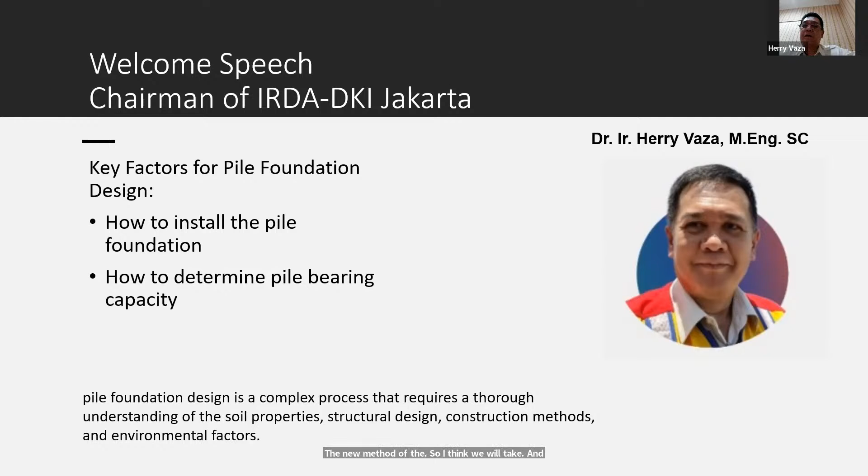So I think today, Mr. Chu and Wayan, Pak Wayan, and then Mr. Marcel would like to introduce to us the new method of the foundation. So I think we will be patient and try to take in all the introduction from him, and probably that can be of advantage to us to use in Indonesia, especially in upcoming projects that we will finish in the next 2 years. Thank you very much, enjoy the seminar and have the benefit from the webinar.

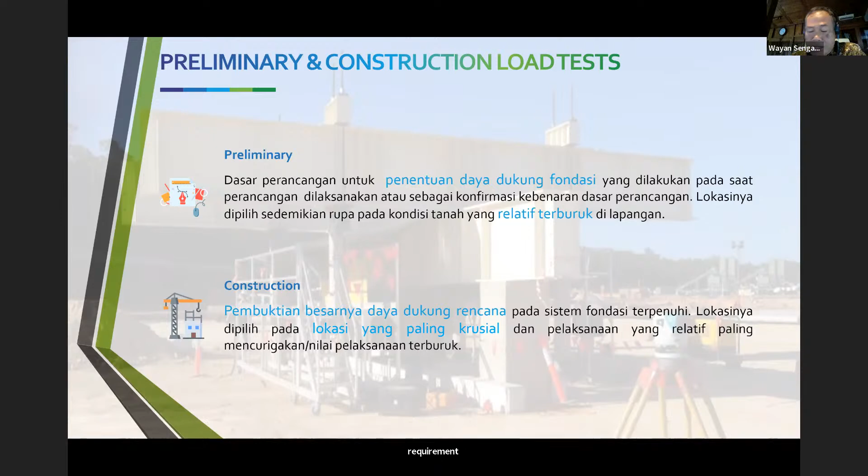So for the load test, we refer to SNI 8460 2017. This is actually the geotechnical requirement, where within this geotechnical requirement we have the specific pile foundation requirement. So this is the list, I think I saw it. So you can find this in the SNI geotechnic standard.

What is the minimum factor of safety for the design? What is the tolerable settlement? What type of loading combination and support, the lateral capacity, what is the requirement? And the last one is the pile test, what is the number of pile tests.

Whether it's axial, static, lateral, and tension, and also whether static or dynamic. For the load test, we have the axial requirement: axial compression, axial tension, and lateral.

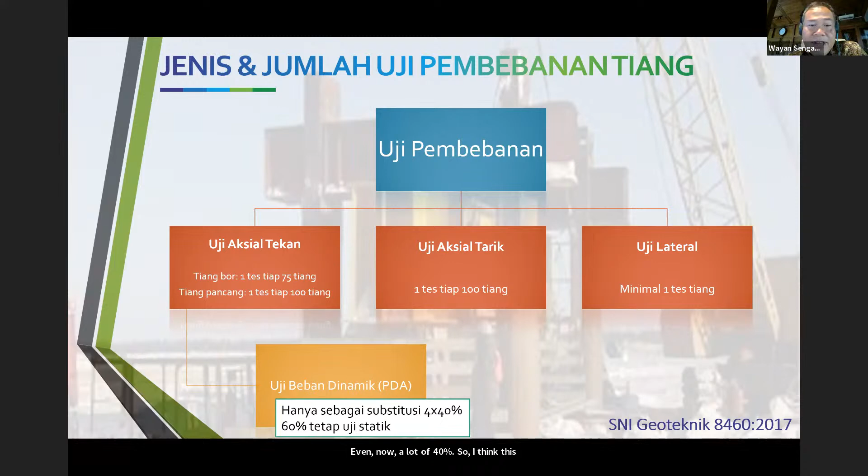This has been proposed last time by the Authority Committee of Jakarta, but I think also the SNI of geotechnical also refers to that. Even now a lot use 40%, so I think this is too many.

A lot of 40% of the total static load test could be replaced by PDA. So I think today's webinar would like to evaluate this requirement, and if we would like to be more stringent, like what is conducted in Singapore, for example, Europe, United States, and also Japan, there is a limited number of PDA, but with more number of static or equivalent static, like maybe what we will discuss today, Statnamic or StatRapid load test.

Okay, this is just another requirement. We need to do 200% of the design load. We can do more than 200%, but usually the requirement is 200%, and also with the maximum displacement allowed for the acceptance of the pile load test.

If we refer to AASHTO, for example, for the particular bridge design, we have this requirement for driven pile and also for bore pile, and the number of load tests is actually not stated clearly, but for every different zone we need to have at least one static load test, and for dynamic test minimum 2% of production piles need to be tested.

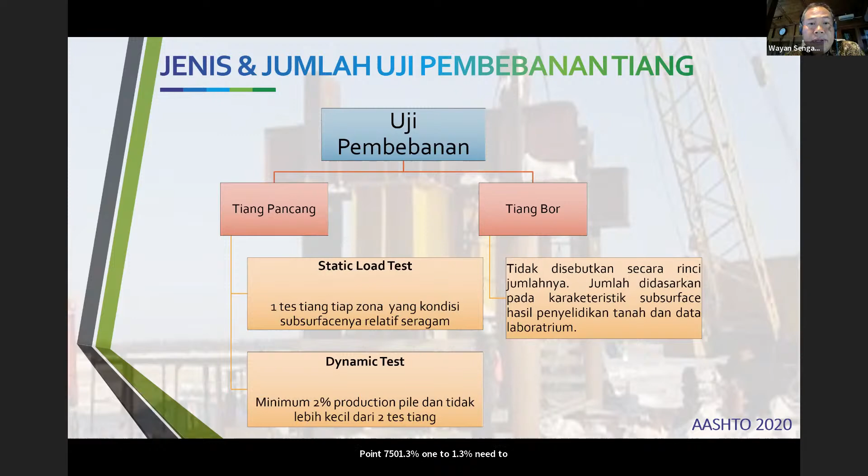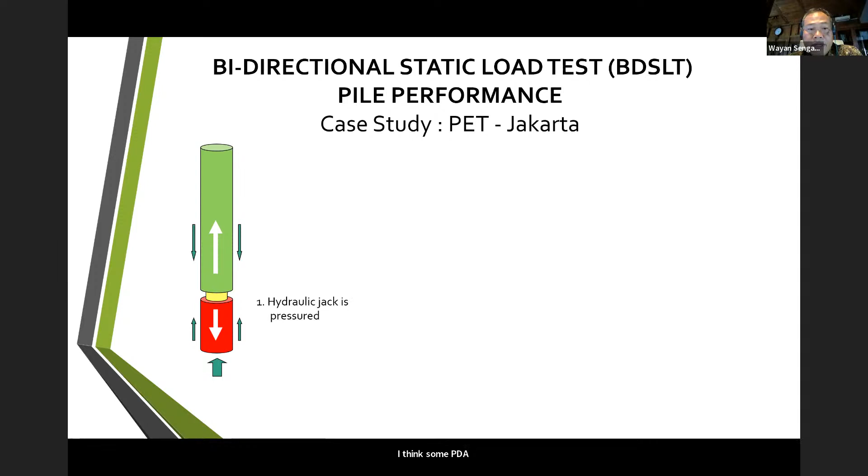Well, again I agree with Herry. The problem with this is we need to locate the cell. There is a theoretical interpretation of this test, so that the unit skin friction at the upper part needs to be equal to the unit skin friction at the bottom, with additional bearing capacity of the pile, which we actually cannot determine yet, but we need to somehow decide that.

We have experience conducting this load test in Jakarta for a super high-rise building, well, a proposed super high-rise building, but not yet constructed right now—up to 9,000 tons, this is a very long pile, up to 110 meters below the ground.

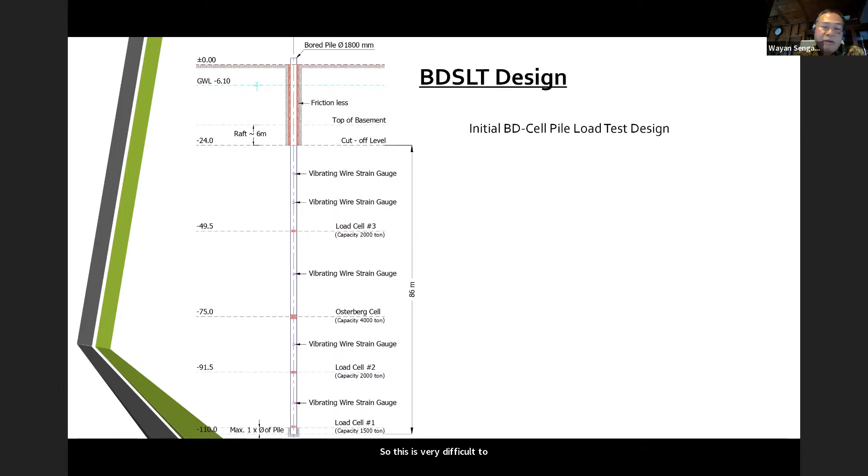So this is very difficult to determine the location of the load cell—this is just our recommendation. But actually the contractor proposed this, and the location was at that particular location, and we are not sure whether the mobilized friction at the top and also the mobilized friction at the bottom plus the end bearing is in equilibrium or not.

So the limitation of this kind of test would be, well, we need to theoretically determine the level of the cells. Some of the end bearing or skin friction might not be fully mobilized. And also it's relatively complicated—the instrumentation takes some time, we need to wait for the hardening of the concrete.

And also, the last time what we identified is the load inclination issue for high pressure load, particularly for high pressure load, and also there's some issue on the interpretation of the load system. Well, this is a new method in Indonesia, even though in other countries this kind of test has been conducted for many years in the US, Europe, and also Singapore.

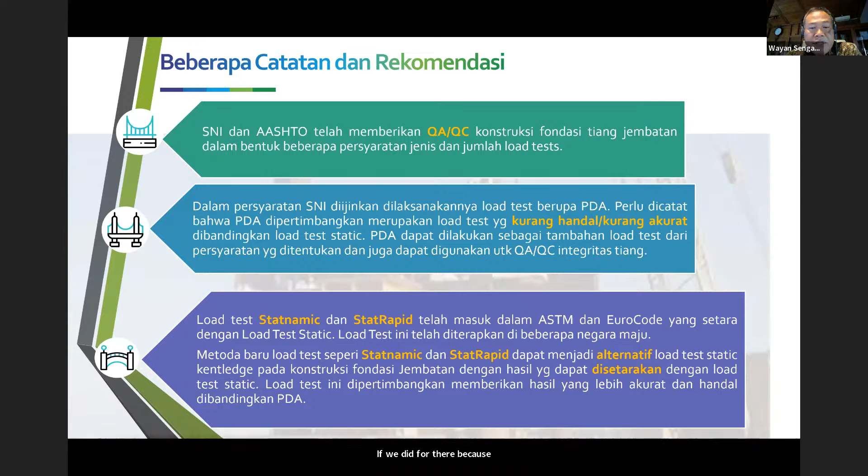So this is a good opportunity to apply it in Indonesia. Later on, maybe the SNI needs to be evaluated further, because Statnamic and StatRapid are more reliable compared to PDA. So those are some of the items we need to identify.

I hope these items can be useful for discussion later on after the Professor Chu presentation. Thank you, Pak Adib. Thank you, Pak Herry. So that's the end of my presentation.

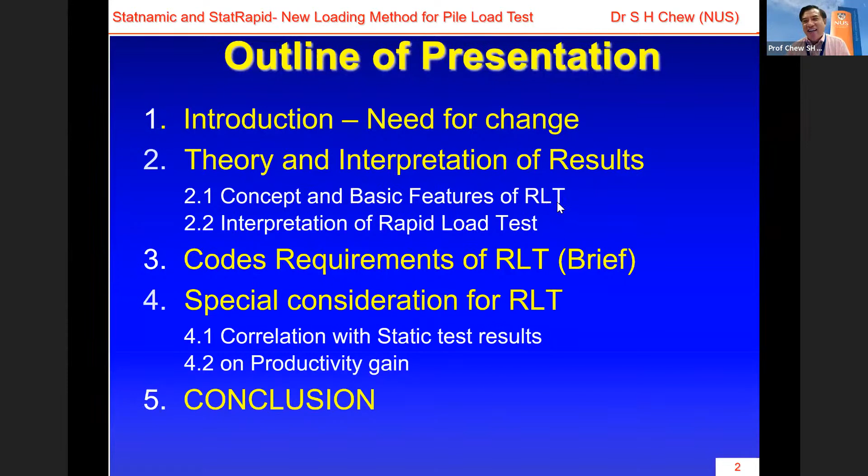Okay, so that's the scope. Everybody still there? Yes? Marcel, yes, you still there?

Okay, good. Now, being a professor in university, we always like to go back to the very basic and fundamental. So what is a pile test for? Pile tests are needed for one or more of these four reasons.

Number one, to determine the bearing capacity of the pile, which I'm sure you all agree on. We want to know what is the ultimate bearing capacity. Number two, which is very important - I saw in your Indonesian code, you also have it.

To determine the settlement of the pile when it's subject to N times the working load, N can be 1.5 or 2 times the working load. We want to know, when the pile is subject to this load, what is the settlement?

Now I will share Singapore, Malaysia experience on this, because we build a lot of high-rise buildings, and I'm sure your capital too. When you have a high-rise building, settlement control becomes very, very important, because you cannot have a high-rise building that's tilting, or one with differential settlement, which is very dangerous. So in Singapore, Malaysia, we have very strict control on this, and that's where rapid load test becomes very useful.

Number three, related to number one, is determining the soil parameters used in your pile design. In Indonesia, I think you call this the preliminary pile load test. I'm sure you do this to verify your shaft friction and unit end bearing, so from here you check your calculation. Rapid load test can do this too, and you use the same strain gauge design as in a normal static load test. So there's no difference - the only difference is the way you apply the load.

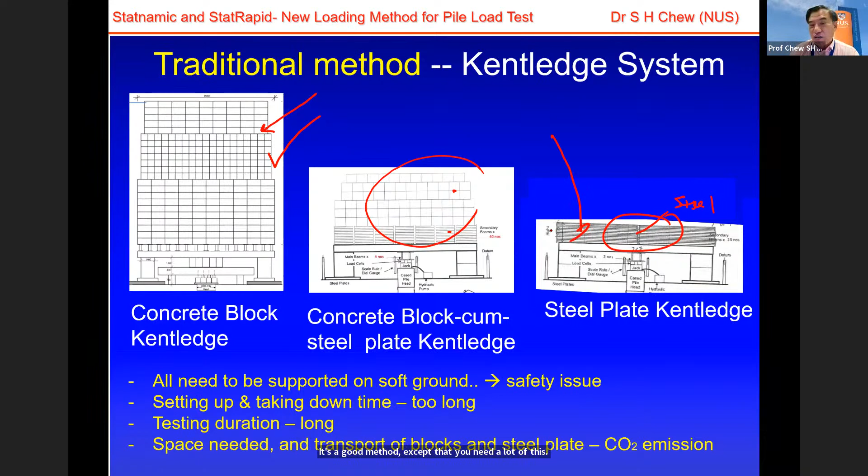Traditionally we use the kentledge block - you can see it on the left-hand side, this is a kentledge block. Then there's also the steel plate method, which saves height - the kentledge block and steel plate have less height, but the total weight is the same. This is a combination of the two. This is a traditional method, and it's a good method, except that you need a lot of this material.

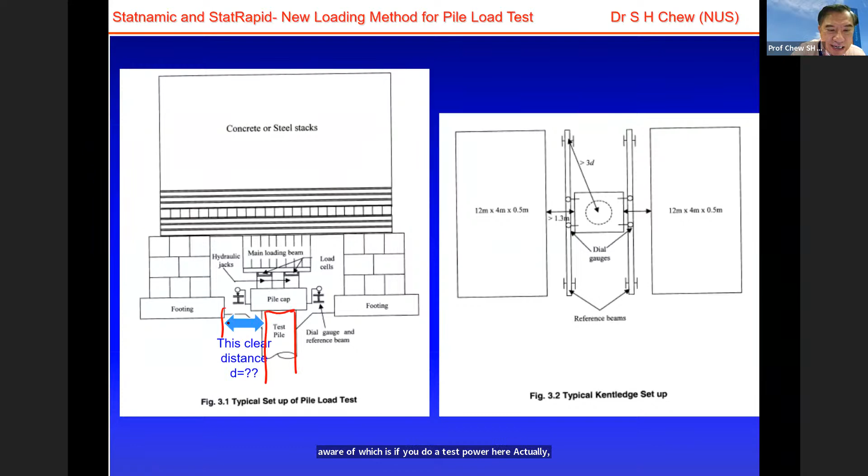This needs time and also extra money. Now, there's also one aspect that not many people are aware of: if you do a test pile here, you actually need to have a clear distance between the test pile and the footing of your kentledge block or steel block. You need this clear distance.

Not many people are aware that this clear distance in the old ASTM was only 1.5 meters or so. But today, it's actually 2.5 to 3 times the diameter of the pile. So if your diameter is 1.5 meters, 3 times the diameter is 4.5 meters. You should have 4.5 meters here, and then another 4.5 plus 1.5. So this distance from here to here is going to be 10 to 18 meters, maybe 17 or 18 meters, which is very wide.

So to support this wide area, first you need a wide space - you occupy a lot of space in your construction site. Number two, to support that, your girder and beam design will have to be very careful. This is something people may overlook - you need a wide span. If you put it too close, the stress bulb is going to unfairly make your pile look too strong.

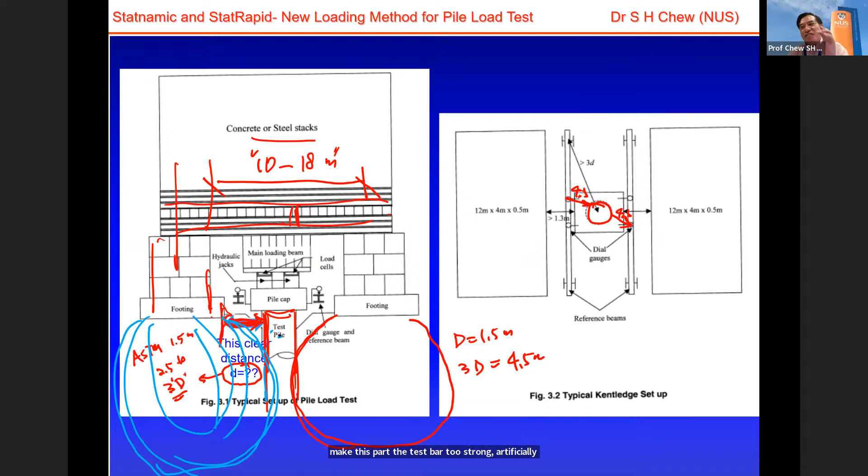You understand my point? If your distance is not big enough, the stress bulb applied here will make this test pile artificially too strong, which is not right. So this is something some people have misunderstood.

Minimum spacing is 3D, whichever is greater. I summarized different codes of different countries. As I said, ASTM long ago was 1.5 - that's because at that time all the piles were very small. But today, if you look at ASTM and later codes, it's actually 3D, 5D, 4D. A lot of these go to 3 times the diameter of the pile. So you really need a big span.

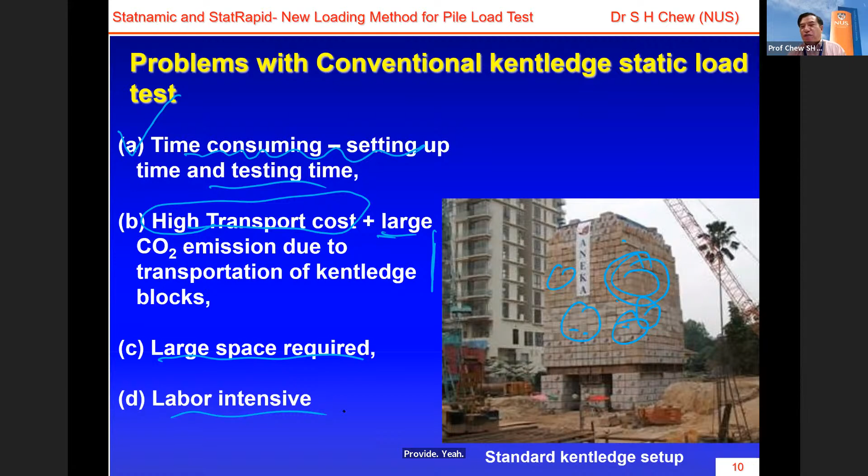Now, more important is safety. So let me show you this - maybe let me show you a video. This happened in Singapore, and you can see the kentledge block actually...

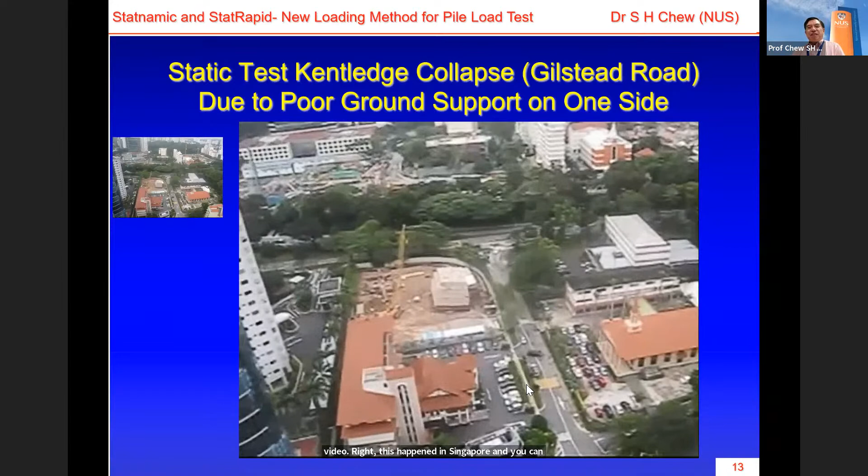Okay. Can you guys see the video? Did you guys see the video? Can someone respond to me? Yes, you can see the video. Although it's moving frame by frame, you can see it, right? You see the whole issue, huh? Okay, I don't need to repeat.

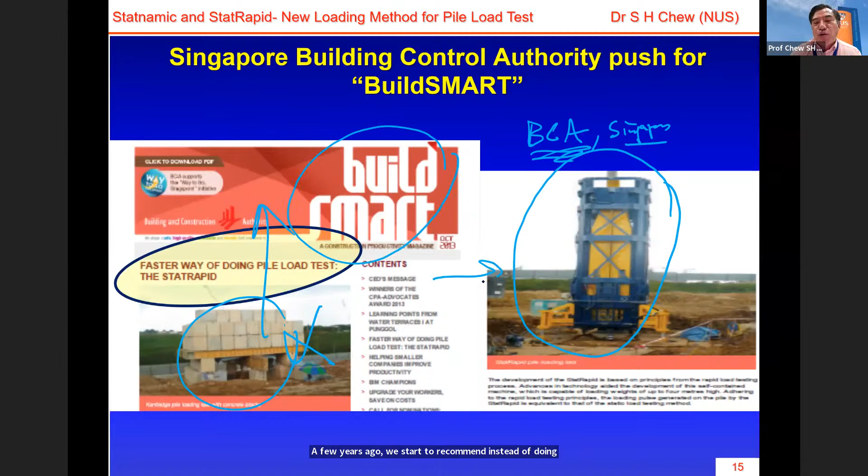So that's the reason why in Singapore, the Singapore Building and Construction Authority, a few years ago, started to recommend that instead of doing this high pile testing, we change to building smarter. So we moved to what we call rapid load test. Let me summarize the advantages of rapid load test first.

Rapid load test reduces the setup time - I'll show you, it's very fast to set up, just one day. Limited space requirement - I'll talk to you about this. And less transporting, because you don't need to carry that much concrete blocks or steel plates - I'll show you. And the result correlates very well with static load test. This is very important. In short, it's accepted in ASTM, Eurocode, and Japan code.

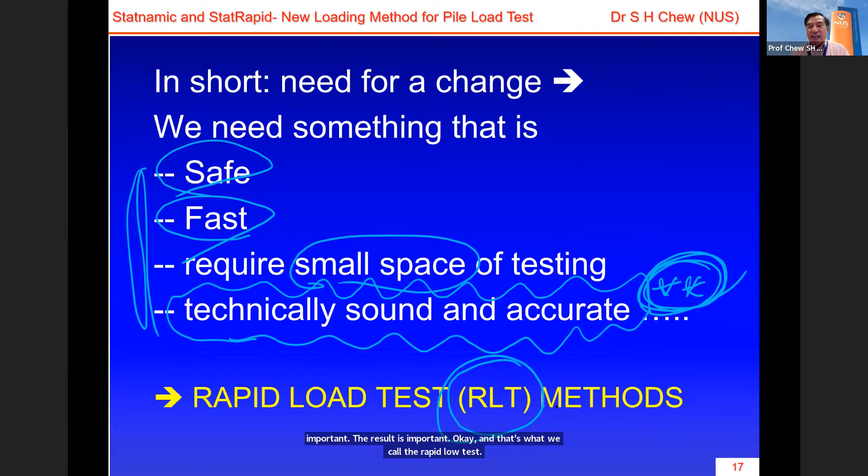High productivity - let me summarize. Safe, fast, small space, and technically sound and accurate. So to summarize: rapid load test is safe, fast, requires small space, and is technically sound and technically accurate. This is important, as a professor, the result is important. That's what we call the rapid load test. So that's a quick overview, introduction.

Before I tell you what that method is, let me make a break. 30-second break. So far, is everybody okay? Can you hear me clearly? Any immediate questions? Please ask if there is.

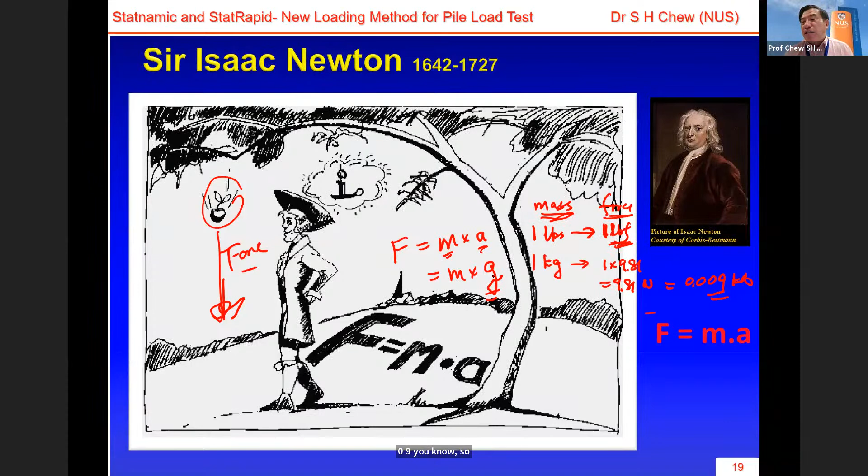But ask yourself, what if the acceleration is 20 g? What if this A equals 20 times g? So therefore, 1 pound of apple will produce 20 pound force now. Can you see that? Instead of 1, I can produce 20 pound force.

So 1 kilogram of mass will produce 20 times - 1 kilogram times 20 times 9.81. So we produce 20 times the equivalent mass of force. Very good, you see that?

Now let me stop here. Remember just now we said the static load test - you need to stack up all the concrete blocks, very heavy. Now I can reduce that by 20 times, 1 over 20. So if you need a 1,000 ton test load, I only need 50 tons instead of 1,000 tons of concrete blocks. That's very beautiful, that's the whole idea.

Okay, so that's Newton's law. But at the same time, we also need what we call this second guy. Just now, that one is a guy from a few hundred years ago, Newton. But I also need a young man, a 21st century man, to make the machine. So this is under TNO.

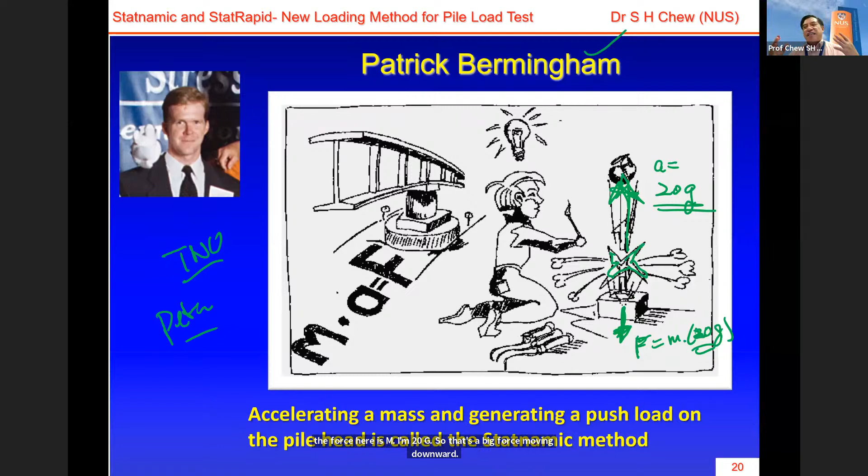So that is the Statnamic - that is the one called Statnamic. Statnamic is not an English word, it's static plus dynamic combined together to become Statnamic. Static plus dynamic - that's how they created this word, Statnamic.

So that is what Peter and the gang have done. Now, what they had to do is make a machine like this - this is the machine that they make. Inside that, there's a white-colored mass, and that mass is equal to 1 over 20 times the test load.

So if the test load is 1,000 tons, I only need this equal to 50 tons. Very little, 50 tons versus test load of 1,000 tons. Okay, I'm mixing the unit of mass and force, you know what I mean, equivalent. So if you need 1,000 tons to test, I only need 50 tons of weight.

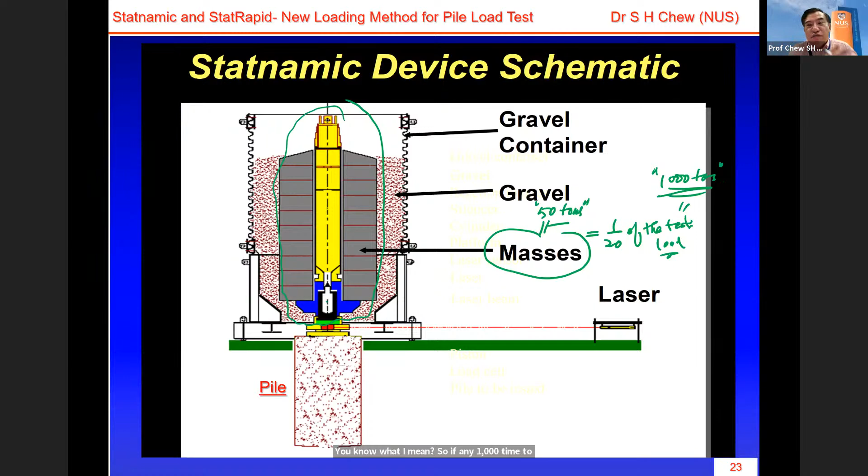Now you need a special thing, which is a special chamber, where I put a special fuel in this confined chamber. Later on, you have a gaseous expansion, expanding very rapidly, and that will produce a large uplift force. This uplift force will push the pile downward, can you see that?

This force pushes the pile down, and then you measure it. That is the whole test. That's it, so that's simple. Okay, you can skip this one.

Now I talk about this fuel. People may get worried, what is this fuel? Actually, this fuel is something like this. Now and then you will light it up. Don't worry, this is not explosive, not like C4 explosive. Actually, it's something like that.

When you burn it, I have a video, I don't know whether it will work or not, let me try. When you light it with a lighter, right, it jams a little bit. You see, you can still hold it.

Okay, can you see the video? Yes, right? Yes, hello, yeah okay. So you can see that actually there's no danger, it's just hot, hold it hot.

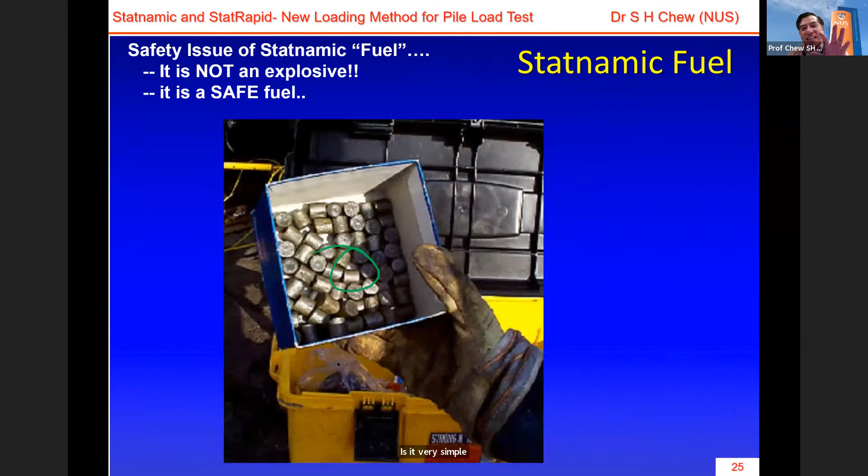But if you put it in a confined chamber, the volume expands very fast, and using physics, Boyle's law and so on, you push up the whole thing, and the force comes down. That's it. Very simple mechanism, developed by TNO at that time, and Peter was one of the key members.

I think the company that I support technically, Mr. Tan and Marcel's company, they can do this test for you. These are some of the tests you can see. Maybe I can skip this, or do you want to see this one? Maybe I'll show this one.

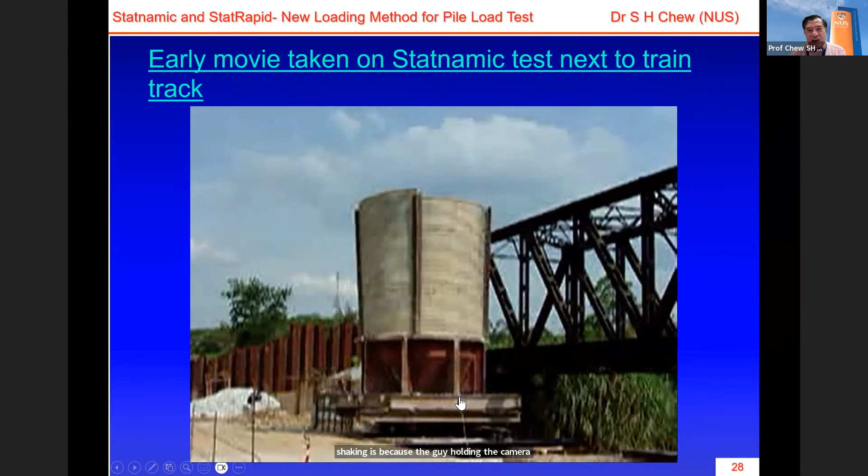This video, okay, I think it's coming up. The video shaking is because the guy holding the camera is next to the Malaysia Railroad, watch out. See that? Okay, you hear the loud voice, the thing goes boom, up, and pushes apart.

That's it. Just now Professor Dr. Henry was asking me how long the test will take. That's all the test, setup may take one day, when you test, that's over. That's it, okay, so we have done a lot.

Just showing you some examples. This is a very limited example that I show you. We have done a lot, a lot meaning in the number of hundreds, if not thousands, in the last 20 years in Malaysia and Singapore.

But the famous ones, Penang Second Bridge, and in Singapore and Malaysia we did it next to a train track. In Singapore, the port development, we did it a few times. And of course, as I said yesterday, in some of the big housing development projects.

Oh sorry, what am I doing? This, no, I can skip this one. In housing development, HDB blocks of Singapore, I think you all know, actually they do a lot of this test.

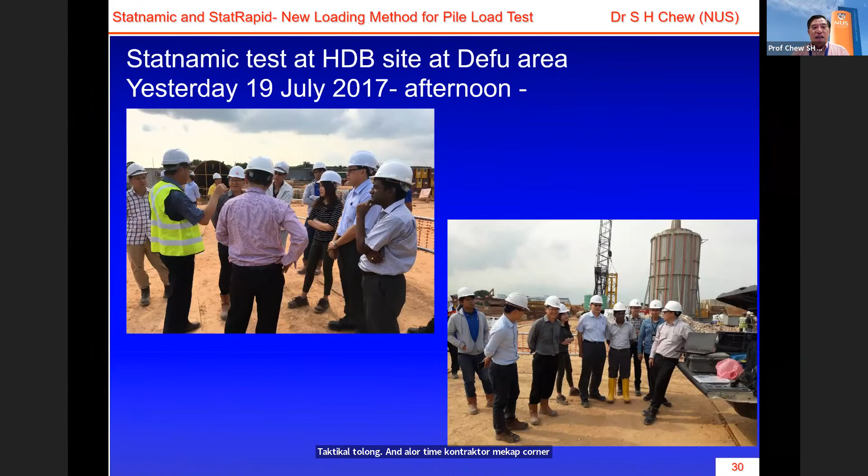Why? Because they have a lot of high-rise buildings to build in a short time, and they need to test all of them. Using static test is going to take too long, and a lot of times a contractor may cut corners. So therefore, rapid load test, after I introduced to them, they were very happy, and we use a lot of it. These are the engineers, officers I talked to, with happy faces, and these are the results.

Now I just want to show you, yeah, this is the result you get immediately. When you run the test, boom, within 100 or 200 milliseconds, like this, then you get a result on the screen. This picture is a load, this is a load, and this is time. So it goes up and comes down.

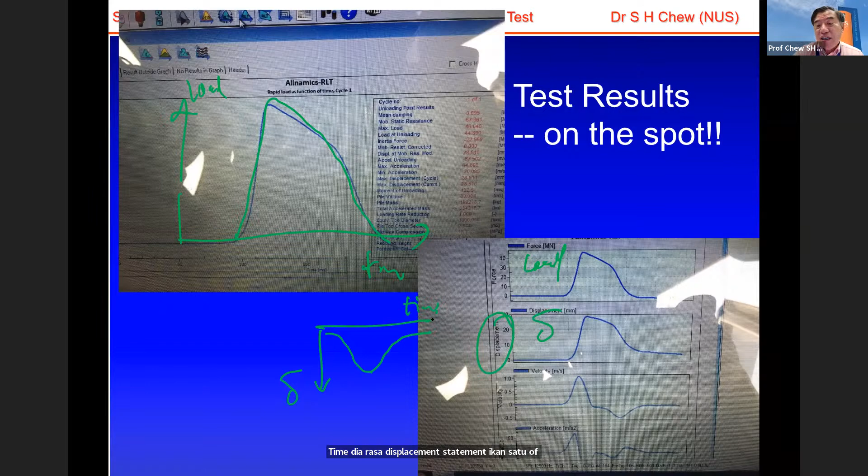This is load, and this is displacement settlement. You settle, of course, and it's the other way around, settle and come back, so this is settlement, and this is time. And then this is the velocity, this is acceleration. So you get all these results on the screen.

That's it, over. Technically, you know whether the test passes or fails. But of course, you let the company go back for 1-2 days to compile the report and send it to you. But basically, you know the result on the spot.

Some of you may be concerned about vibration. We also monitor vibration, and in fact you'll find that all the vibration is well within limits, of course within 10 meters it's big, but further than 10 meters it's nothing. It's well within all the construction limits. In fact, I published together with Peter a paper on vibration in Japan.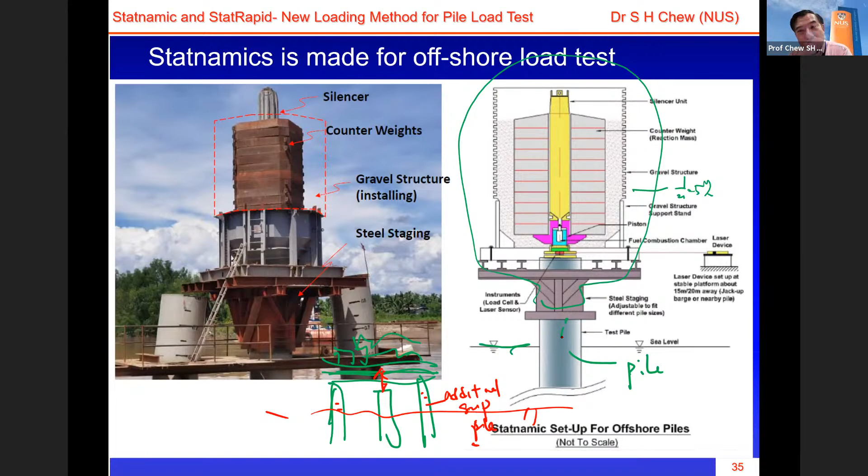That's it. We have done quite a lot of these tests in Malaysia, both in Western Malaysia and Sabah, Sarawak. Sarawak is just north of your capital city, same big island. What's the name? Kalimantan, big island there. So we've done a lot of tests in Sarawak on this method, across bridges across the river. So that is something very useful.

Okay, so that was the first method which I introduced as a concept. But the really method I will introduce - who is this? Henry, can you recognize this man?

He's none other than your good friend Peter, and his team is Allnamics, which we worked together in for the last almost 20 years. So Peter, after Marcel - I hope what I say is correct - after he was about to retire from TNO, he said, hey, I'm going to invent a new method for my own company. So he developed a StatRapid method. Statnamic belongs to TNO, and then they sold it to somebody else, that's a separate issue. But now Peter developed the StatRapid method.

So in StatRapid method, he doesn't play with fuel anymore, instead he plays with a special cushion. So you drop a mass, which you can call a hammer, but I don't like to call it hammer - I like to call it drop mass. It's a special drop mass, put on something, a special cushion. I'll draw it here, but actually it's a very special cushion. When you drop on that, this cushion is subject to compression and will generate a deceleration of 20 times G.

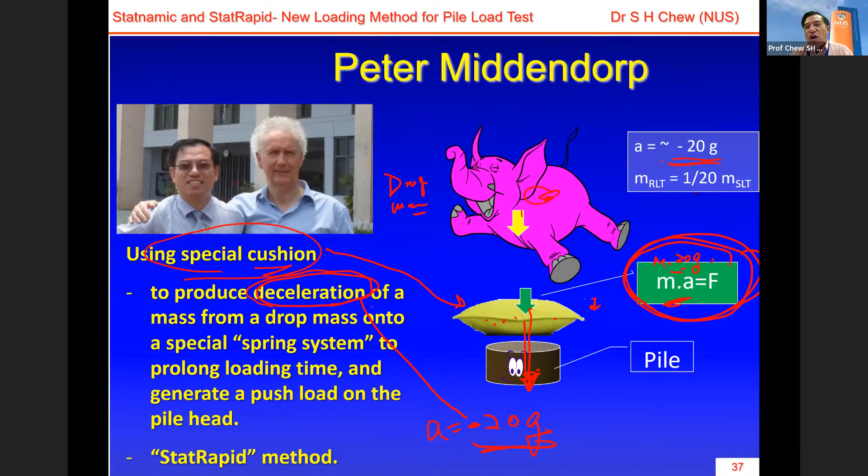A equals minus deceleration of 20 times G, so therefore it produces the same force. Minus means the direction, so now the force is directly applied onto the pile. The magnitude is mass times 20 times G, that is the force. It's the same as dynamic, except now the force is downward because it produces that deceleration, causing the mass to push the pile down. That's it, so that's called StatRapid.

And of course the name tells you it's the same, a newly created English word: static plus rapid load test, put together, StatRapid. So therefore it will give you a long duration load.

And you can see from these pictures, the yellow color is the mass - you can call it drop mass or whatever you call it - and then there's a cushion here, it's a special cushion, I'll show you secretly a little bit. This thing will drop from a height, so this thing will drop onto that and produce a force.

This cushion is different, it's not the PDA cushion. The PDA cushion is to protect the pile top only, it cannot perform the function of decelerating or whatever. Whereas this special cushion will produce the A equals minus 20 G - that is the secret. This cushion has to produce that deceleration.

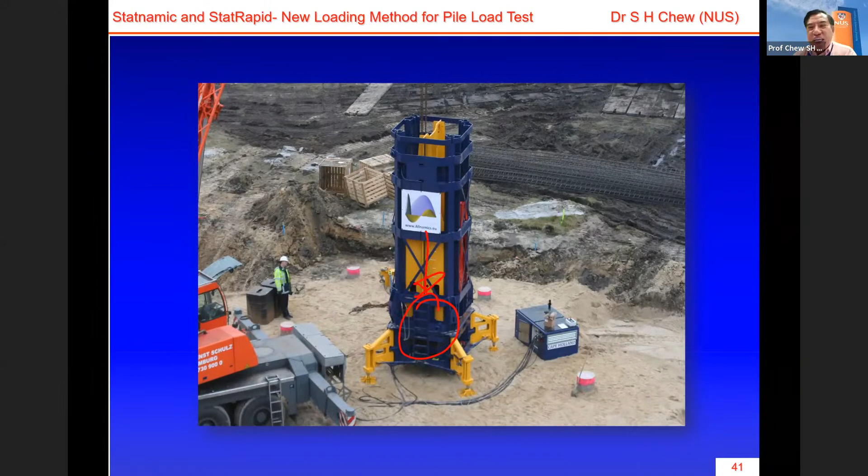Okay, now these are secret pictures, I'm showing you the cushion. It can compress like this, and then it will bounce back. Okay, let me quickly show you - in short, I'll put the cushion here, and then the drop mass hits onto it, and that will give you the force. Now let me show you the real run.

Okay, this is an interesting run. Okay, let me show you. Yep, I hope you can see it because this is important.

Okay, I stop here first. Let me bring this away. How do I bring this away? I cross out it. Okay. You can still hear me, huh?

Okay, you can see this yellow color thing is the mass. There's a gap here, there's a height, huh? Of course this height not much, but there's a height. Cushion is at the bottom, and the pile is below.

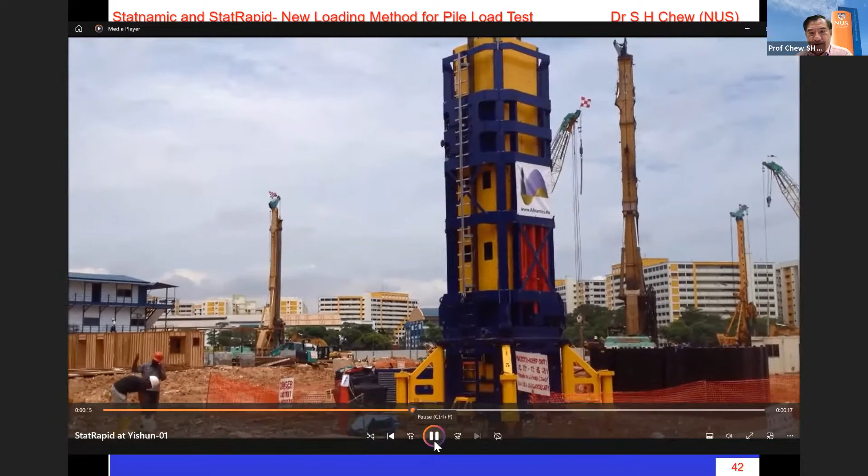Okay, now in a few seconds I'm going to turn on the video. You can see that this yellow color will drop, hit the cushion, and then bounce up. So watch carefully, huh? Okay, coming up. You see that? Yellow cushion was here and drop and come back. See that? That's done. Over.

Everybody see that? Everybody see? Right. Yes. Yeah. Okay, I'll show you one more time.

Okay, but this time very fast, huh, at the very beginning. Okay, I show you one more time. This one is a different one, but it's the same. See? Let me repeat this one.

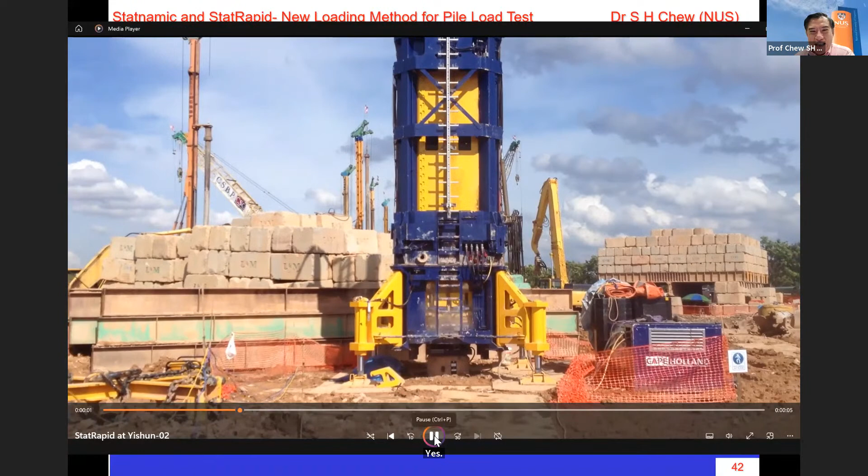This one at the beginning, okay, see? The yellow one is here. There's a gap here, gap at the middle. The blue color, you don't see. The pile, this one you can see the pile. The pile at the bottom.

You can see there's a reflective white strip here. Later I'll talk about that. That is the one to measure settlement very fast using laser beam. Then on top is a load cell. It's a standard load cell that will measure the actual force.

Okay, so you can see, very fast, this yellow thing is going to drop, hit onto the cushion, produce a deceleration. The force will load onto the pile and then bounce up. When they bounce up, this machine can also catch on it.

Once you catch on it, you can move to a different height and repeat the test. So this machine can catch it and then move to different height, drop again, and bounce again, catch it, drop again. Okay, now you see, very fast.

See? Okay, it drops and then it bounces a little bit and then it catches. Okay? See the pile is here?

Like hammer. Looks like hammer, but the trick here is not so much on the hammer, it's a cushion and also able to catch it. It's able to catch it. Okay, looks like hammer, yeah, but it's more than a hammer. The normal hammer, if you don't have the right cushion, don't have the proper design, it can't work. So you need this frame to support it as well.

Now, this frame, I should explain a little bit of this frame. This frame is very well designed because this hammer is going to drop free fall. You cannot have friction around. So therefore, this blue frame must be perfectly vertical.

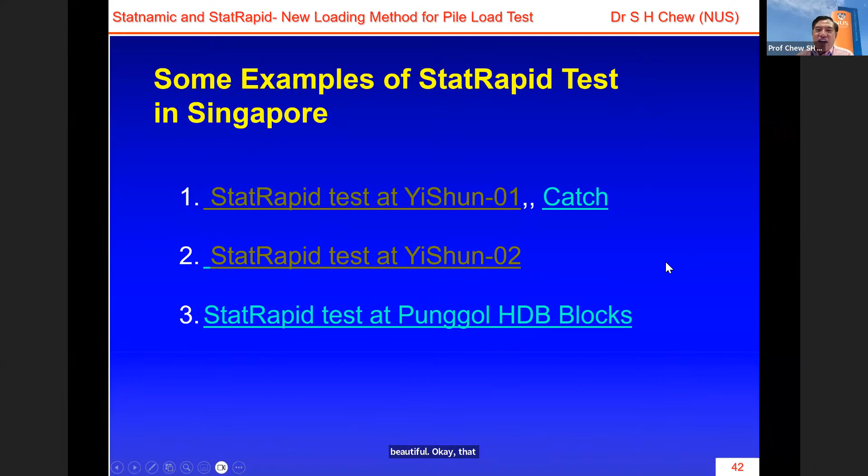Okay, that's beautiful. Okay, there are many projects done again. If not many hundred, in fact close to 1,000. Okay, I think the video works, so I don't need to elaborate more.

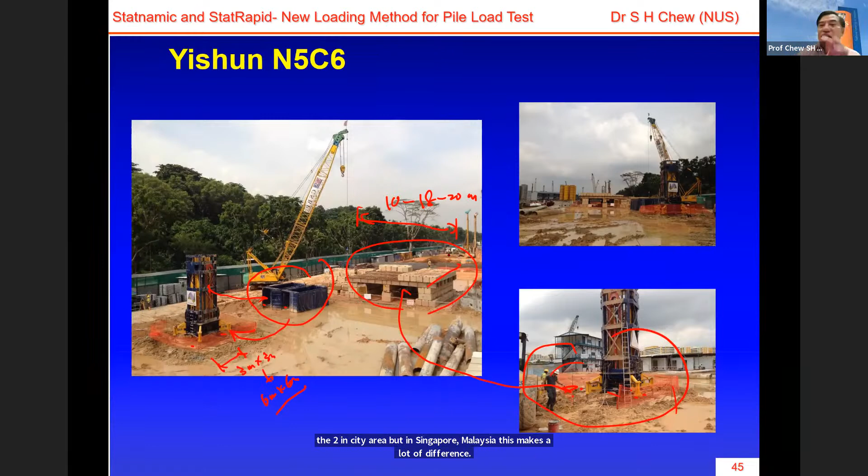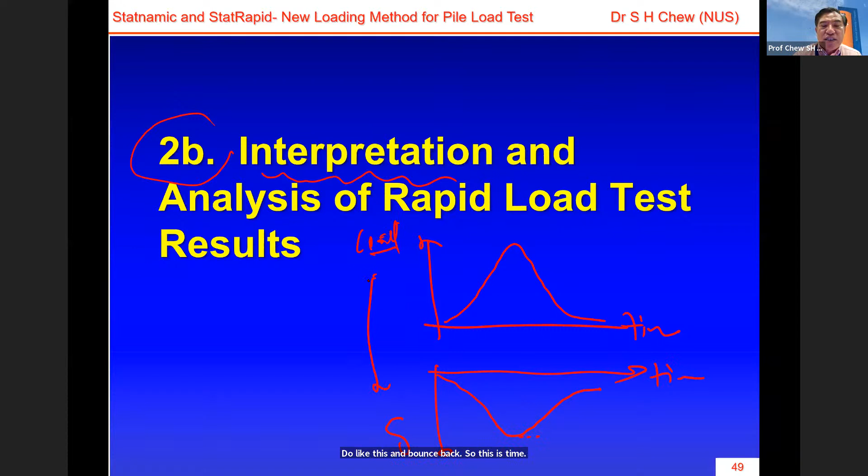Okay, so now let me come to a very important aspect: interpretation. When you get a test result, remember just now we said you get a test result like this - this is load, this is time, and then you also have the result of settlement, which does like this and bounces back. So this is time, this is settlement, this is load. So we have these two results plus velocity plus acceleration of the pile.

What can we interpret? Remember, what we want is the static capacity. What do you have? This is rapid load test. Rapid load test is not dynamic, but a little bit of dynamic. So how do I get this into a static equivalent? That's what we want. Let me repeat: rapid load test has a little bit of dynamic component. How do I interpret such that I get a static equivalent?

Okay, we can skip all this. Come to the equation - this is the equation of motion, a simple equation of motion. This is the mass of the pile, we're talking about the pile now.

A pile like this - I have a mass drop, hit onto it, okay, and produce that deceleration. Anyway, there's a force applied here, so this pile will move. So when you move, there's an acceleration, there's a velocity, there's a displacement. U is the displacement, which is settlement, okay? K times U is the static force that we want - the static capacity we want. But now we have these two additional components.

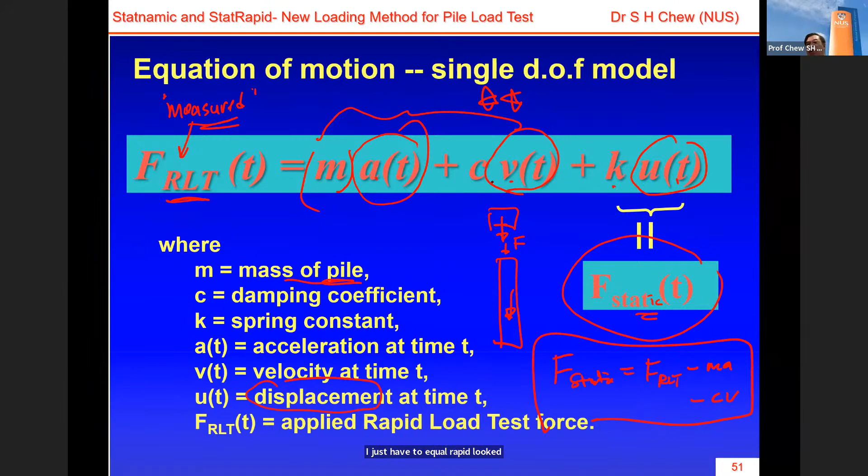And the left-hand side is the rapid load that you measure - you measure it exactly by the load cell. So therefore, what you have to do is very simple: I want the static force, I just have to take the rapid load test minus MA minus CV. That's it, minus away these two. That's all. Okay, so this is just explaining, but it ends up with the same answer.

Never mind this, at the end this is okay. This just explains using soil parameters, but never mind that - eventually, at the end of this simple equation. It's just on the 2-3 slides, explained in terms of soil parameters, but it doesn't matter. At the end it's rapid load test minus MA minus CV.

V is the velocity of the pile, A is average acceleration of the pile, and this is the mass of the pile. All these are measured because I'll show the instrument later on. You put an accelerometer on top, similar to PDA, but more accurate than PDA. From there you get acceleration, from there you integrate and you can get velocity. And you know the mass of the pile, and you measure this by load cell.

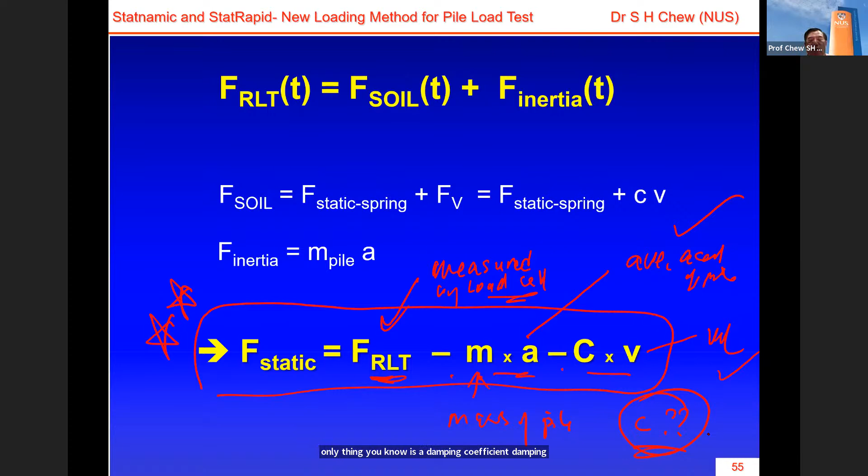So the only thing you do not know is C, the damping coefficient. That's something we do not know. We can make some simple assumptions if you want, then the whole thing can be solved. Okay, let me show you.

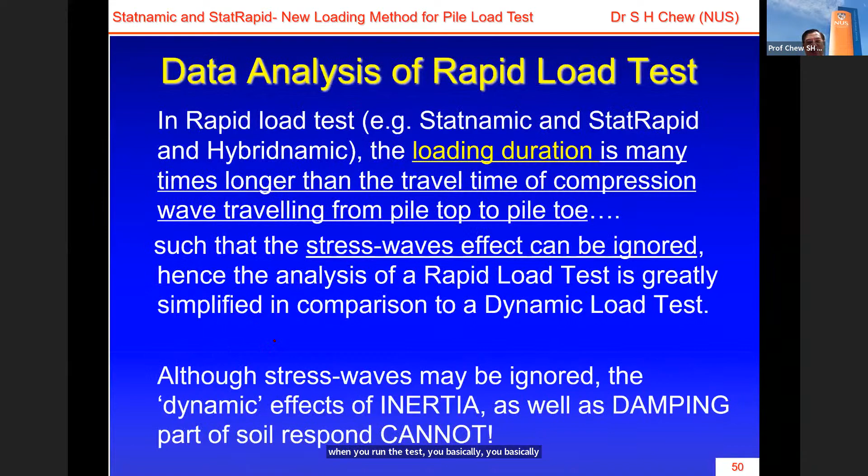At the bottom, before the pile comes back, the velocity here equals 0, because velocity downward is positive, upward is negative. From positive to negative, there's a zero in between. So velocity equals 0. Remember the formula just now: static force equals rapid load test force minus MA minus CV. If this velocity equals 0, CV equals 0.

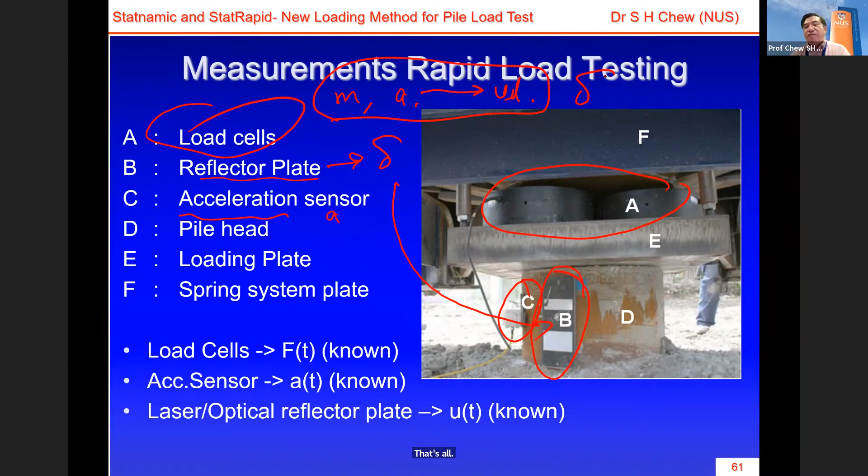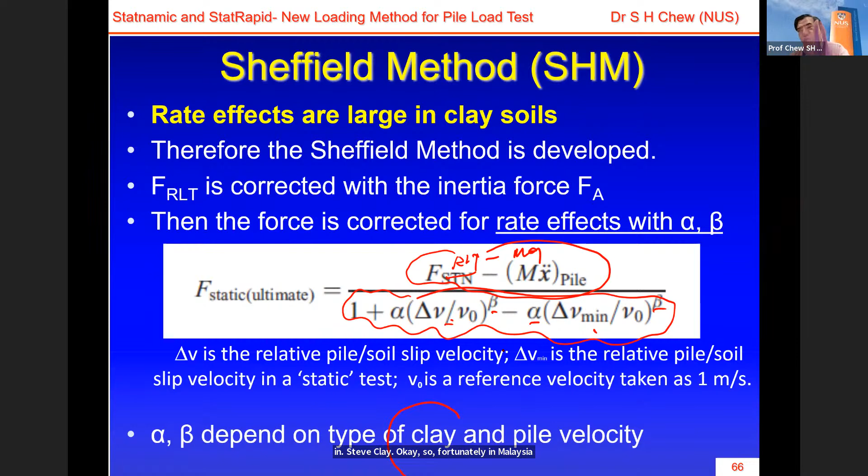So fortunately in Malaysia and Singapore, most of our ground is actually good sandy ground, so I don't need to do this - I'm happy to do this simpler method most of the time. So far I think we are doing this 99%, and doing the other one 1%. Well actually we do have one or two cases where I need to do this.

Right, just a quick summary: the rapid load test analysis results are unique and person independent. There's no 16 parameters, and you can get an equivalent static curve. This equivalent static curve is simple and straightforward - there's no signal matching required. And based on this we can get very good results compared with the real Kentledge static test, which I will show you in a short while.

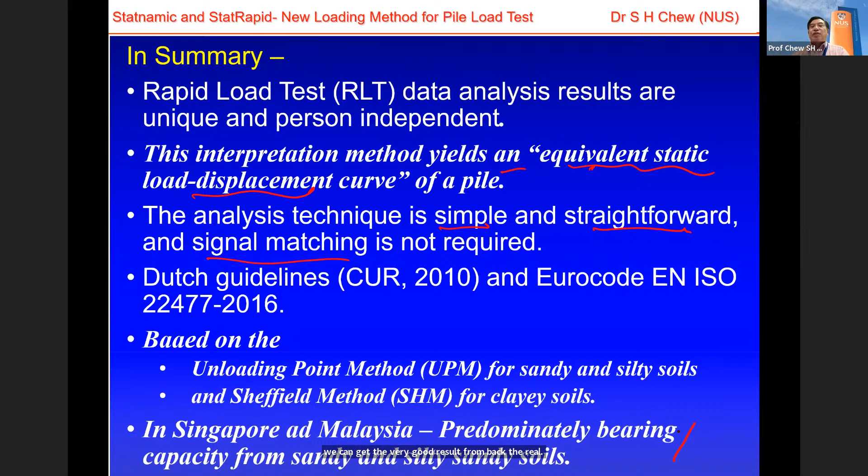Okay, the same picture - I want to remind you on this, and I'll break here.

Okay, let's break for 30 seconds again. Any comments, any particular questions on this interpretation related? Is everybody still there? Hello, everybody still there? Still here, clear? Still clear? Henry, still there, clear?

Maybe it's too heavy for us, Professor Chew. Yes, okay, maybe Professor Chu, you could explain again - the concept is, I think, not difficult for everybody to understand. Precisely, force equals mass times acceleration.

But the interesting thing is for the stat rapid test, you mentioned that there is minus 20 G with that cushion. So if you can explain that one more time - okay, you see, I have a cushion. This is a pile, this is on the ground, and I put a special cushion here.

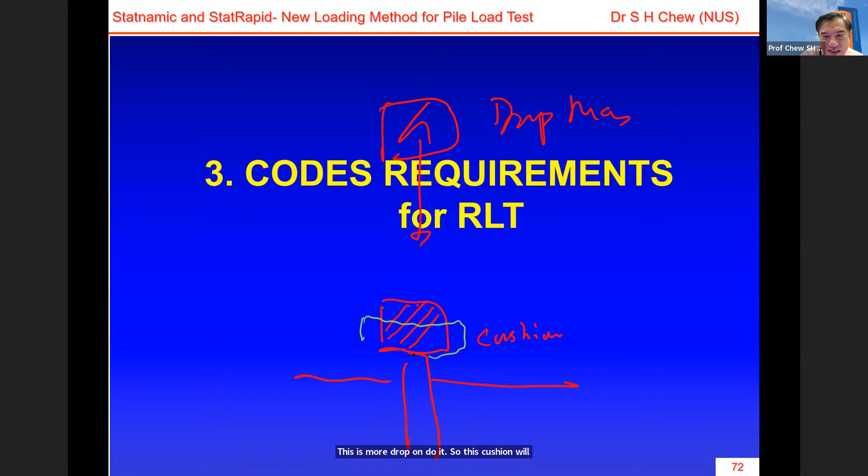Okay, I have a drop mass. This thing will drop onto it. So this cushion will basically have to compress like this, isn't it? Will come to a stop. This drop mass - let me change the color - has to come here and press on that. So it will compress, and from here to here, you're subject to deceleration.

For example, you have a spring. You put a spring there, you put a load inside, the spring will compress and then stop and then bounce back, isn't it? So that spring, when you compress, the mass will start from big velocity, go to stop there, and then bounce back. There's obviously a deceleration because velocity comes from big velocity when it hits, then comes to a stop and bounces back. So therefore, there's a deceleration.

Now, if you ask me, Dr. Chew, can you measure this? Yes, the answer is yes, but you don't need to. Why? Frankly speaking, I don't care. Why? I put the load cell here. A load cell. Put a load cell here. This is a load cell.

Then I measure. I put a 1,000 ton here - to be honest, I put a 50 ton mass here. If I put a timber cushion, let's say, I measure with the load cell roughly 50 ton force only. But I put this special cushion, and if it works, it measures 1,000 ton. Right, so that is a magic. But of course, you ask me, hey, can you give me a formula for this cushion? Well, too bad, you'll have to ask Peter.

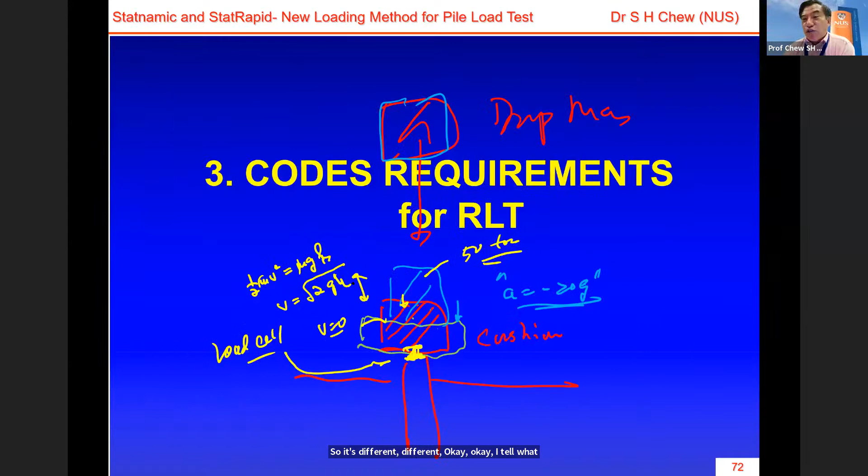I tell you what, give me another 10 to 15 minutes. I'll share something else on the code and correlation quickly, and then I'll open the floor for questions.

On codes, I'm going to skip a lot, just to say that in Japan it was approved in 2002, in the Netherlands even earlier, I don't know what year. In the USA, ASTM approved it in 2008, Eurocode in 2016 - all approved. In Singapore, we accept all these codes. Malaysia, we accept it too.

Now, this is what Wayan also showed you - this slide I have, ASTM D7383-08, of course there are subsequent yearly revisions but it's the same. In fact, I would say ASTM is the one who introduced the word 'rapid load test' - this name came into the picture through them.

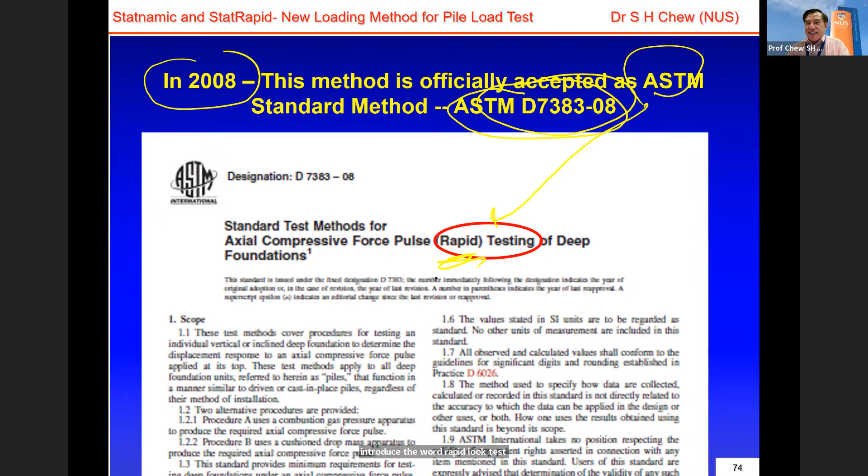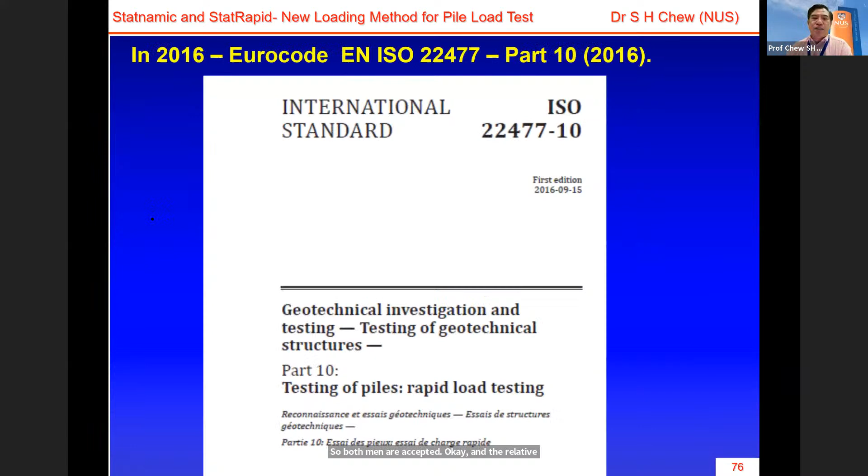In ASTM, if you read carefully, section 1.2, it describes what we call Statnamic - a combustion gas pressure apparatus, and also cushion drop mass, which is StatRapid, in sections 1.1, 1.2.1, 1.2.2. So both methods are accepted in the same standard. We'll talk about the relative advantages of both next time, but both are accepted. In 2016, Eurocode also included it, and has a statement somewhere inside that whatever test here is equivalent to the static test measure - that's where 'static equivalent' comes from.

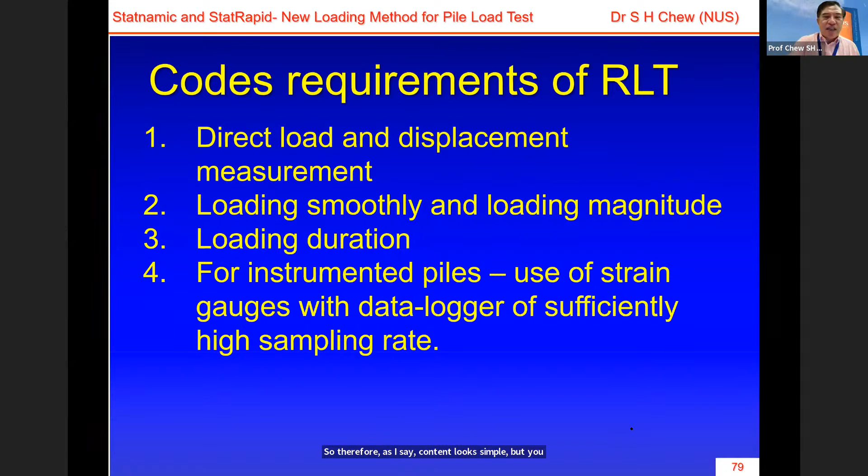Both ASTM and Eurocode have a lot of strict requirements on how to conduct a rapid load test correctly so that the interpretation can be correct. That's important - sorry to say, if anybody buys a hammer and drops it, thinking that's a rapid load test, I'll tell you it will not satisfy the ASTM code. So as I said, the concept looks simple, but making the machine work to satisfy these requirements is not as easy as you think. There's a lot of requirements there.

I'll skip most of it except to highlight one thing: the code says you must measure load, measure displacement, and measure acceleration - but high-strain PDA does not satisfy this. I just want to point that out. The loading requirement is very important - you must produce a load that goes up and comes back, and this duration, based on ASTM, must satisfy 12 L over C for zero load, or the duration must be more than 4 times L over C, where L is the pile length.

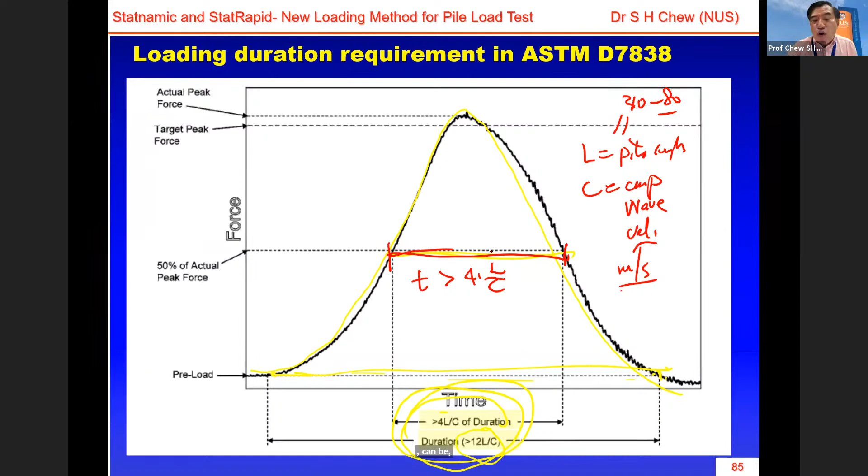C is a compression wave velocity, in terms of meter per second. So you do this, L can be 40 meter to 80 meter, 90 meter, like that. So the longer the pile, the longer this duration needs to be.

So for this rapid load test, the wave propagation is not important. PDA - can you see only one time or less than one time? So the wave propagation effect is important there, so you need to do signal matching. But for rapid load test, I don't need that - it becomes a rigid body movement, things like that.

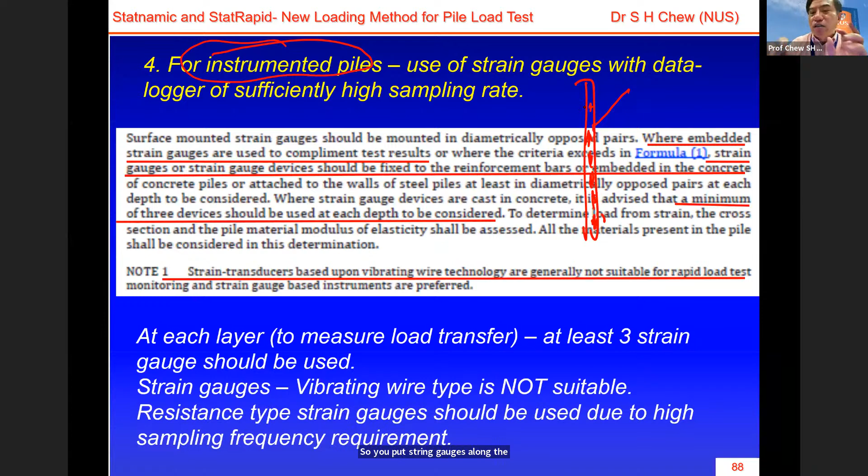I think that's about all I want to cover due to time constraint. I just want to say one word - if you want to do instrumented pile, meaning you measure the pile shaft resistance, you put strain gauges along the pile shaft, you do the same thing. The only thing is the type of strain gauges - you cannot use vibrating wire, you must use the resistance type strain gauges, which is the old established method.

To be honest, I'm sure today all the old professors' research on piling is done on this. Vibrating wire is a new one, which is good, except with vibrating wire you take the reading at 1 hertz - 1 hertz means 1 data per second. Now remember, my whole cycle test, typically from here to here, is 200 milliseconds, 0.2 second.

You understand my point or not? In 0.2 second the test is over, so I need a lot of data points. But if you do with vibrating wire, you have 1 data point here, next data is here - I mean it's over. You cannot capture this curve. So don't worry, just use the old traditional resistance type strain gauges, which has been in the market for 70 years. It's perfect.

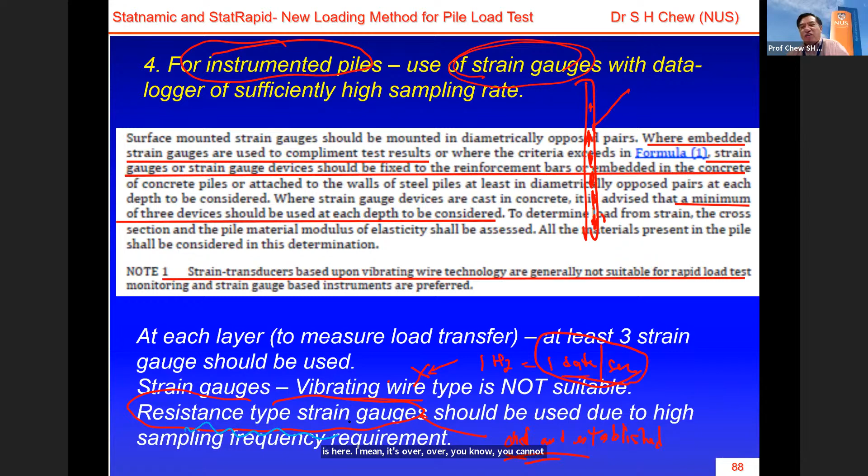So I just want to remind you on that. Now last but not least, what I want to share is to prove to you that this compares very well with static. I'm going to show you a few slides - this is very important so you're confident.

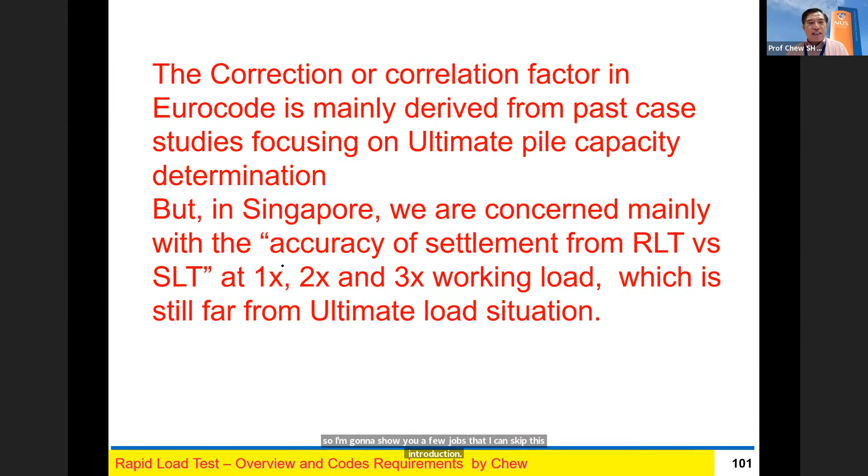We can skip this - this is a test result. This is static test, this is dynamic. And again, it's not too accurate at one point, with the assumption of C, but still not too bad.

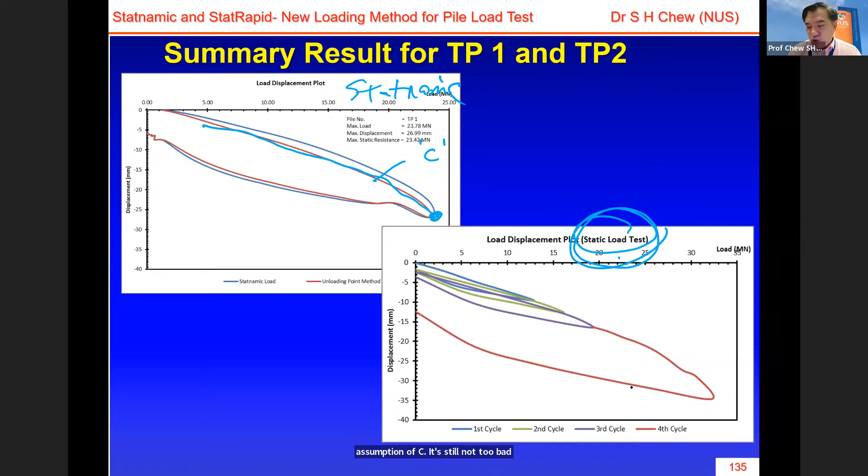So now you put the static, and then you put the two together. Unfortunately they are different diameter, but you correlate it - that's what you get, one is static, one is dynamic. But of course, dynamic has to go through the unloading point method to get the static equivalent. When I tell you rapid load test means rapid load test, go through the unloading point method, then get the static equivalent, which is this red curve. You see, the comparison is very good - for geotechnical engineering, this is like a few mm.

Okay, good - this is a big pile in Malaysia.

Now in Singapore, we do a lot more - previously it was dynamic, but now we do a lot in StatRapid in Singapore. You can see this one. We have again many hundred tests.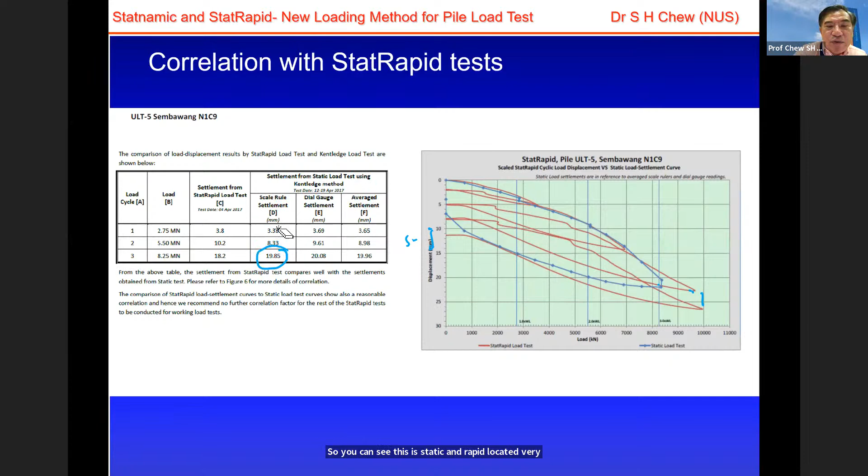There's a second one - can you see the two curves? This is 5 mm, from here to here is 5 mm. So you can see static and rapid load test are very close. Look at the number again - which one is static? This is settlement of static, kentledge. Kentledge average is 19.96 and rapid load test is 18. I like this one better - different by only 1 to 2 mm, that is more correct. Just on one it's exceptionally accurate, but a lot of the time we get 1-2 mm different, which geotechnically is perfect.

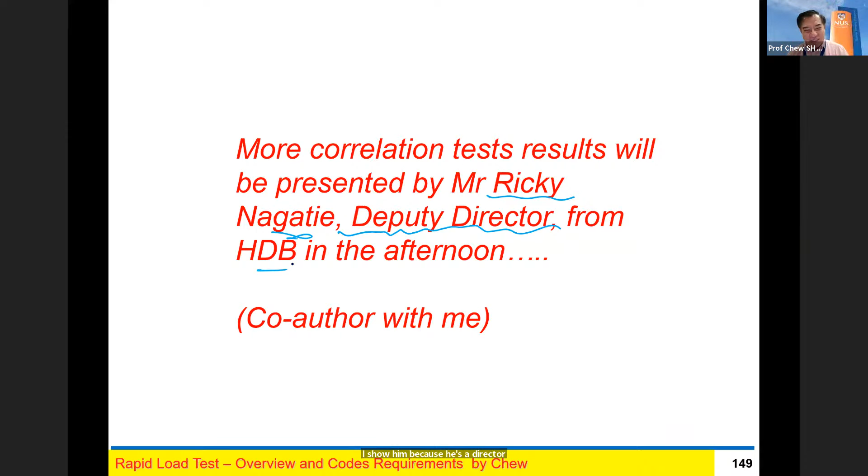Now let me show you more results by Ricky Nagatie. I show him because he's a director of HDB, and more importantly, he is Indonesian - he's my good student, my student from NUS, and he works for government HDB now. He wrote a paper with me, and we presented it at a conference last year in Rotterdam, correlating rapid and static load test results in Singapore.

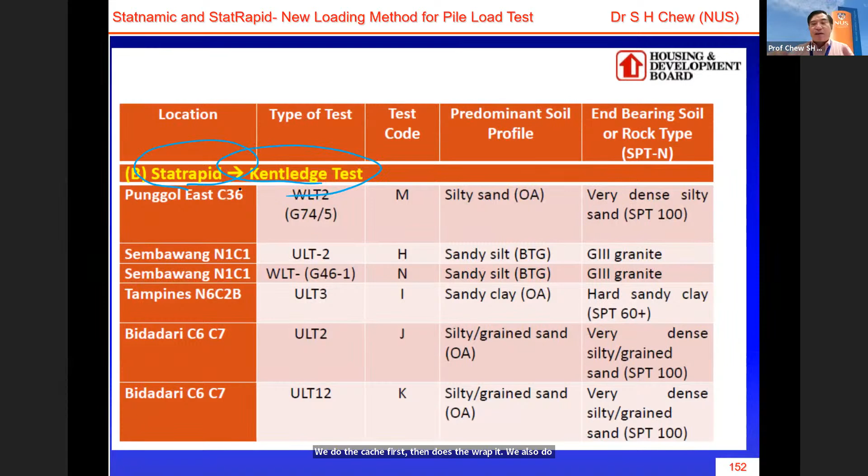Look at the result - we've done many tests comparing kentledge, doing kentledge first then StatRapid, and also doing StatRapid first then kentledge, on the same pile in different types of soil. The detail I'll show you next time if you want, but this is the result. This is settlement for rapid load test, this is settlement for static load test, and this is 1-to-1.

But if you take that into account, see - same data, these two are the same data, 2-time working load. I put it to 3 times - you can see the biggest difference here is 5 mm. So this one is obviously 2 to 3 mm, in fact less than 3 mm different. You see the point?

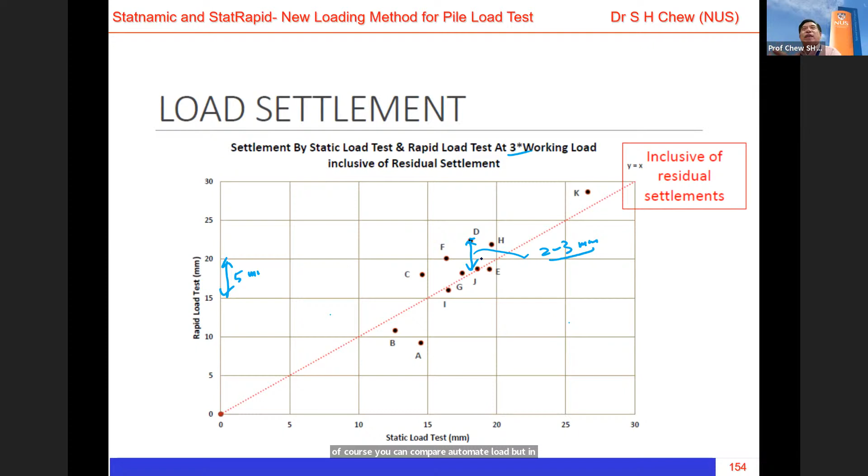So let me repeat: in Singapore, Malaysia, most of the tests that we get, correlation can be as good as settlement within 2-3 mm when you test up to 2-3 times of working load. And that is what we're interested in - that's what your high-rise buildings are interested in. Of course, you can compare the ultimate load, but in Singapore, Malaysia, we like to compare the settlement at 2-time working load because that is important for your proof load test rather than ultimate load test.

Finally, on productivity, I can skip all this - I just want to show you this is a big project in Singapore. Skip, just see the last number. Okay, wait, where's my - I want to move this board away.

This one is important: a normal static kentledge test takes 16 days because in Singapore you have to transport all the blocks. This one takes 3.5 days.

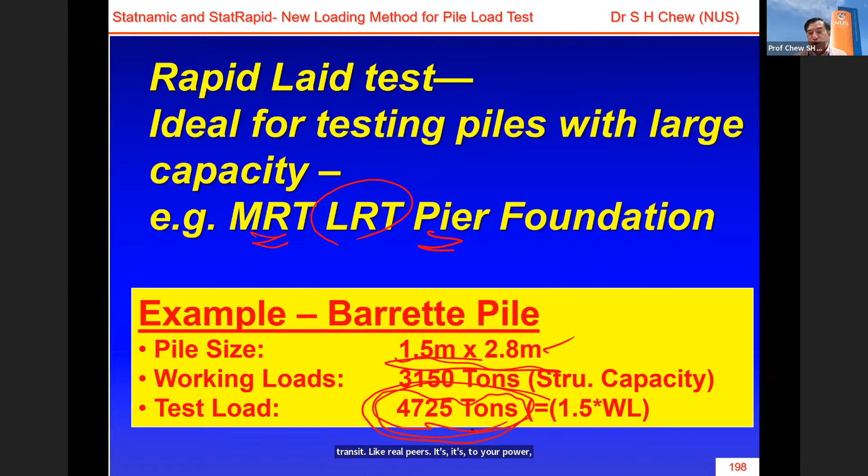Rapid. Next project, a big part, tested at 4,725 tons. It's a big barrette pile for the MRT, our mass rapid transit, like a subway, for light rail piers, similar to your power bridge piers - big diameter, big power, big load, and we test on location. Static requires this high, but dynamic only needs this much.

The footprint number, we can skip this one because that's super big. So the conventional method needs 9.5 weeks, and I need only 4 days, 3.5 to 4. No matter how big or small, it's 3.5 to 4 days.

That's the beauty of it. Of course, to be fair, transporting the equipment from Singapore or Malaysia to Indonesia is a separate matter. Professor Wayan, you cannot say 'Dr. Chew, you said 3 days, so you ship the thing in 3 days' - no, shipping is excluded. Once you're at the site, it takes 3 days.

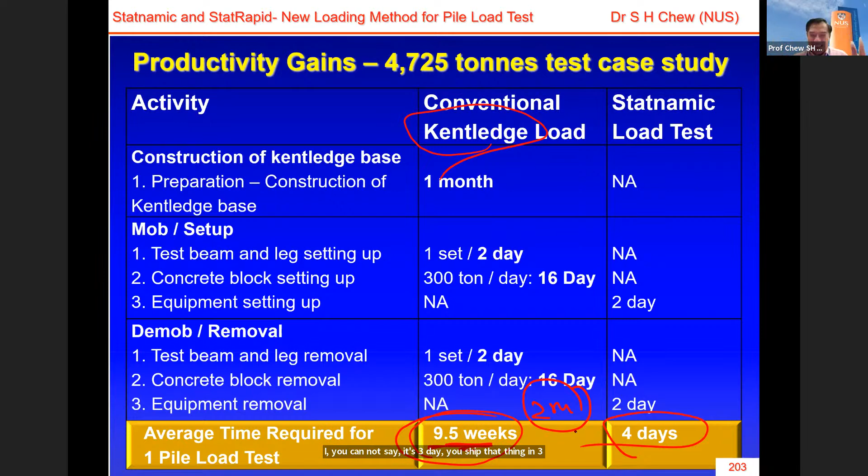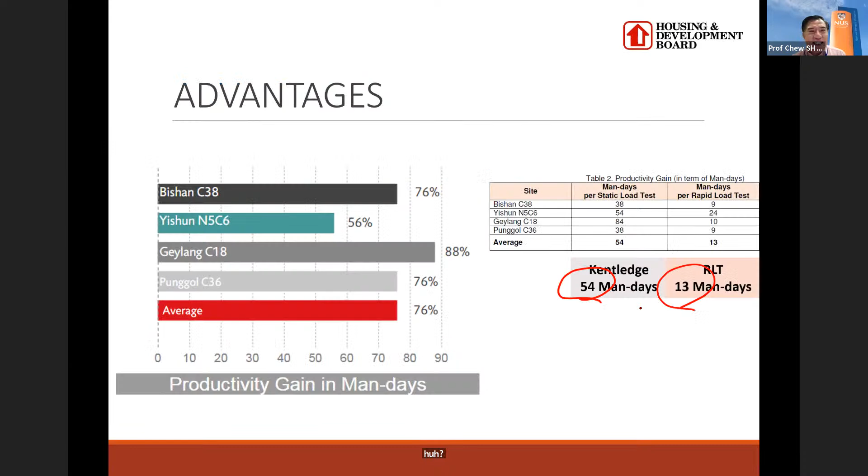Okay, I think that's it. I just want to end with a summary, a conclusion, in 3 sentences. Let me breathe in.

Number 1, the load settlement behavior of test piles subject to static load and rapid load are very similar, so they correlate very well. The correlation between the two tests - rapid load test and static load test - is found to be excellent in terms of specific settlement value or load settlement response, which most of the time we want: load transfer curve, mobilized skin friction, mobilized end bearing compared with static. They're very equal, almost identical most of the time, provided you do it properly.

Provided the spring - I think Adib was the one who asked - the spring must be properly calibrated, the test conducted properly with proper equipment, you get very good results.

So finally, a safe, productive, and easy to use device has become available, which allows pile tests to be performed economically, reliably, and beautifully. Maybe that word 'beautifully' should end my lecture today.

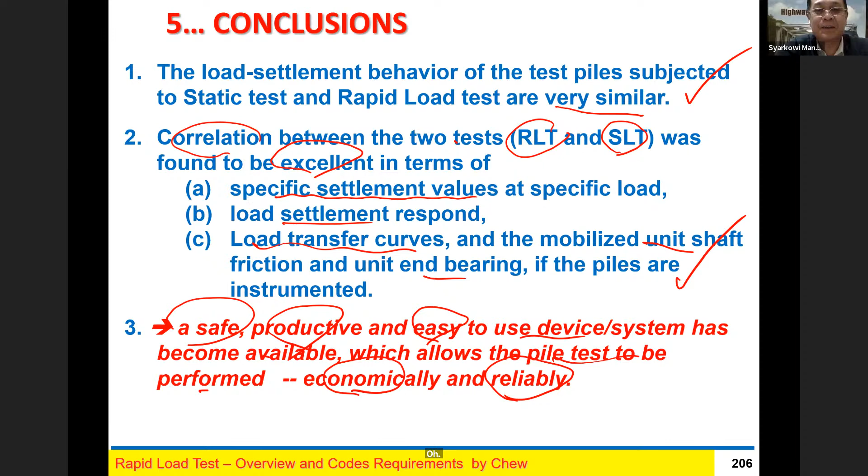I would like to ask about the possibility of using this with a variation of pile diameters, bore piles. In the case of IKN, it's only one single diameter, 1.5. If we have many different diameters, can this device be applied simply, or with many kinds of diameters?

Thank you, good question. I think that's a good question to end on. In principle, you can test this rapid load test for any diameter of piles.

In Singapore, the Building and Construction Authority has fairly strict control, even for static load test. If the whole site has some piles 800mm, some 1,000mm, you can test either one - 800 or 1,000, that's it. Fine, 1 meter, fine. But if you have piles at 800mm, some at 1,000, some at 1,200, some at 1,500 meter diameter, in Singapore the BCA government will require you to test 1 pile on 1% of the 800 to 1,000 range, and 1% on the 1,200 to 1,500 range. You see what I'm trying to say? Testing on 1,200 can represent 1,500. Testing on 800 can represent 1,000, but testing on 800 cannot represent 1,500.

That's in Singapore. But I'll show you the result in Malaysia - that was my proposal, and we did it and wrote it in a paper. We found that if you calibrate with normalized diameter and normalized working load, the test results can be equivalent. But that's still within, say, 800 to 1,500 range. If you want to represent a much bigger pile, like 2.0 meter, 2.5 meter, or 2.8 by 1.8, I think to be fair you'd better test two sizes. You understand my point? And this applies not just to rapid load test.